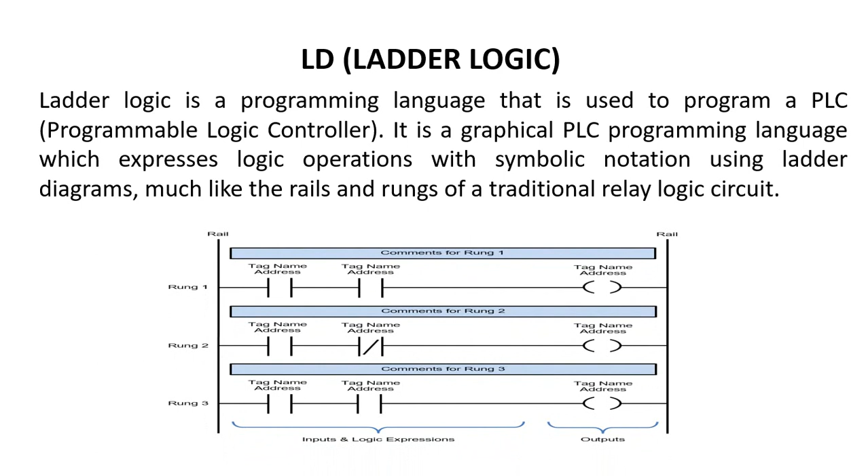So, ladder logic diagram. A ladder logic diagram is a programming language that is used to program a PLC. It's a graphical PLC programming language which expresses the logical operations with symbolic notations. Using ladder logic, we can draw many applications simply. So it has rails and rungs for a relay logic circuit. So this is an example with a rail and a rung.

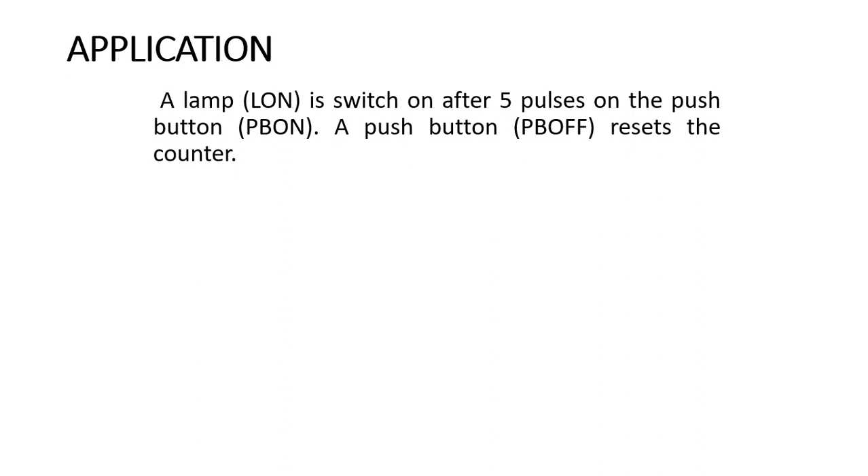Now we are going to design a ladder logic diagram using a counter. The application is: a lamp L is switched on after 5 pulses of push button PB on, and PB off resets the counter. So we can take the address of PB on as 07 and PB off as 08, and the lamp on is at 06. How to manage this application?

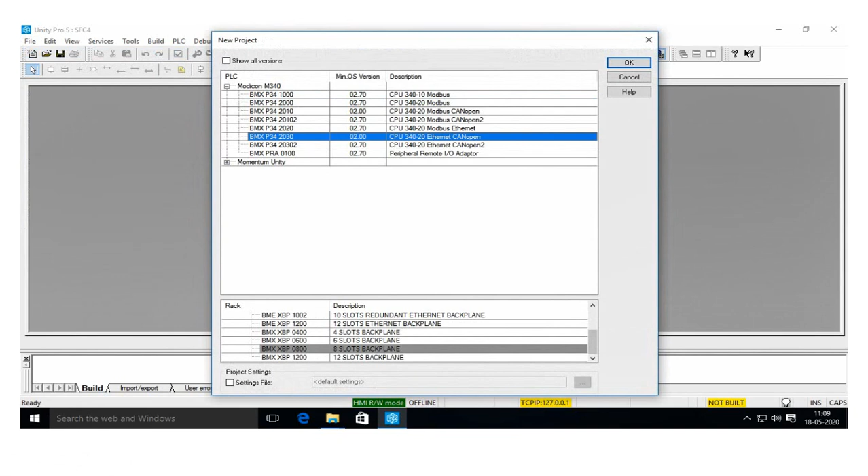So we are going to see about the counter application now. For that, go to File, New, wait for the module P34 2030. We have clicked it. Give OK. So it takes some 2 minutes time. Then go to PLC bus. Double click on the PLC bus.

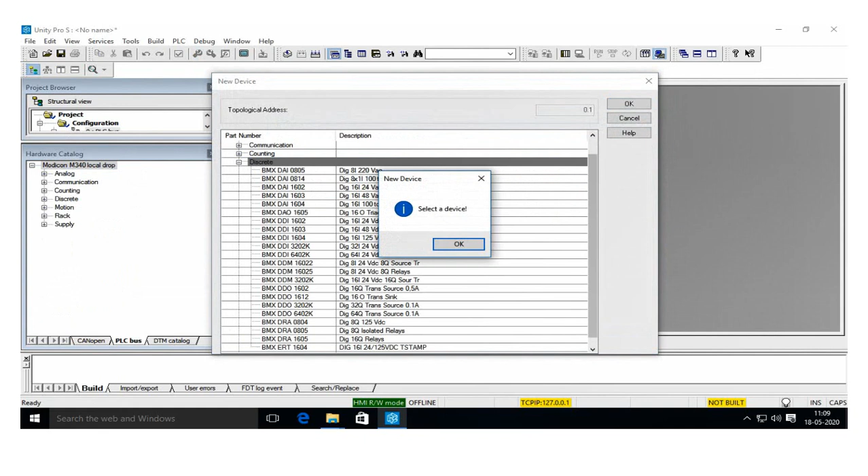Then the input slot. So it is DDI. Click on discrete. Give DDI 1602. And output is once again discrete, DRA 1605. I will configure the inputs and outputs for that BMX DDI: IO objects, %I. I will give update grid.

In that, for our application, I will give PB on, PB off, and L on. As per our application, I will give it in the 7th slot. Okay, that is PB on. I'll put it in caps for the identification, PB ON. And similarly, I'll create PB OFF. So I've created that also. Then I'll give update grid.

Once again, I come to the PLC bus. In that, I'll create IO objects, %Q, update grid. And I will give the output as 2.6 as per our requirement. So I will give it as L on, that is lamp on. And once again I'll create it and update grid. So this is done.

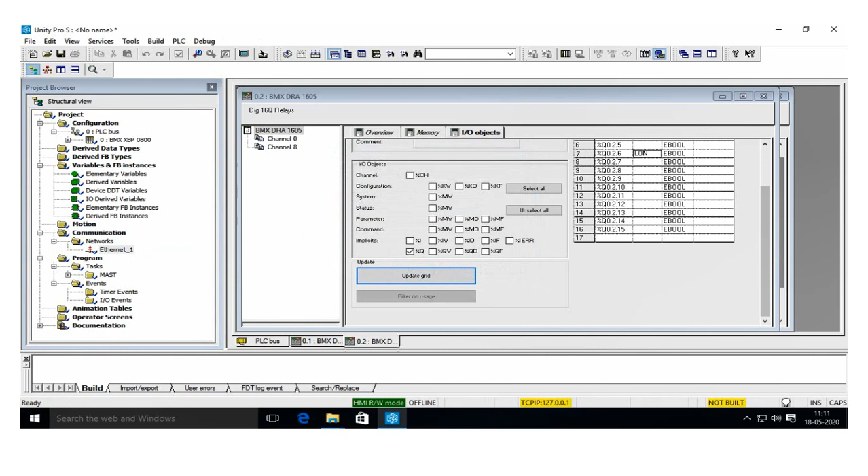Once again come to the navigator, communication. I want to make a new network. So it will be Ethernet by default. I will click OK. Once again I will click on the Ethernet. IP configuration I have to do. It will ask for the change of family.

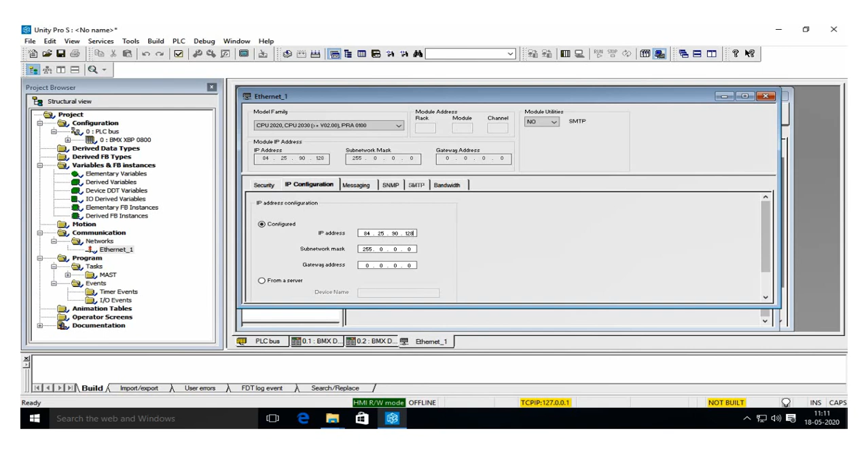And I will give the IP configuration as: first it is 84, dot 25, then 90, once again it is 128. So I will validate it, but still it's not solved.

I'll go to PLC bus. In PLC bus I'll double click on the port. IO objects, sorry, channel 3 in the TCP IP. Link is Ethernet 1. I'll validate that. Okay, now the validation is done. Ethernet is active.

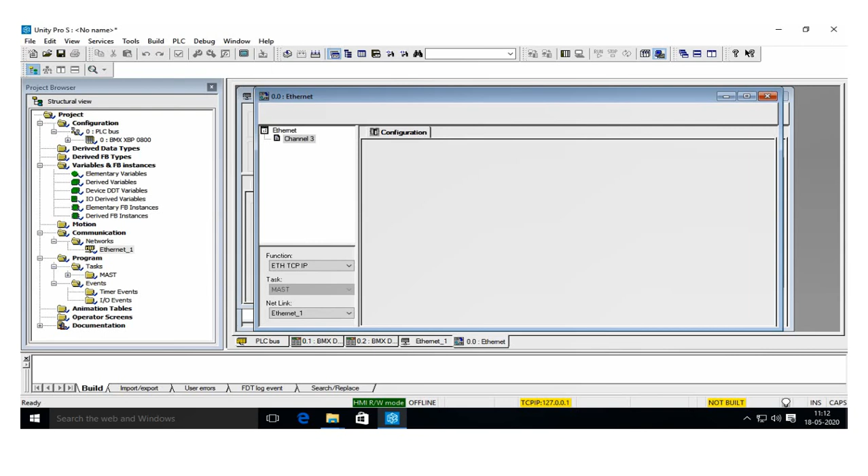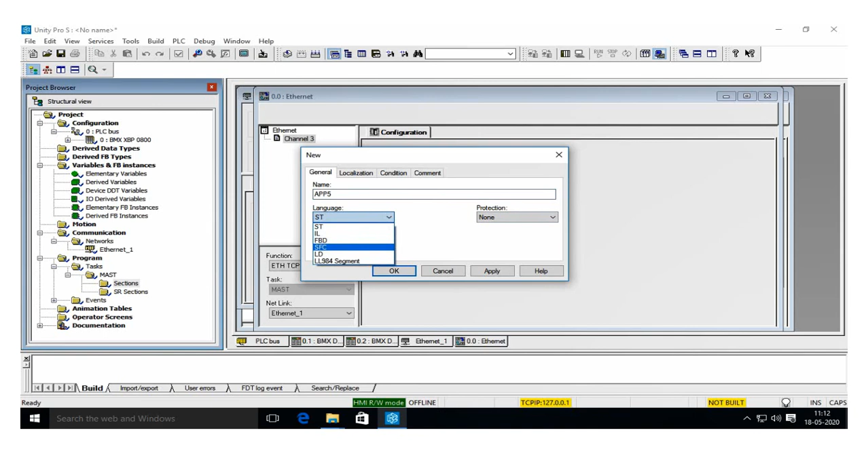Okay, now I am going to create the application. For that, I'm going to the MAST, and in that, event sections, new section. So it is counter application, or I will name it as the application name APP. So it is almost 5. Give LD and give OK. Now the working screen is open.

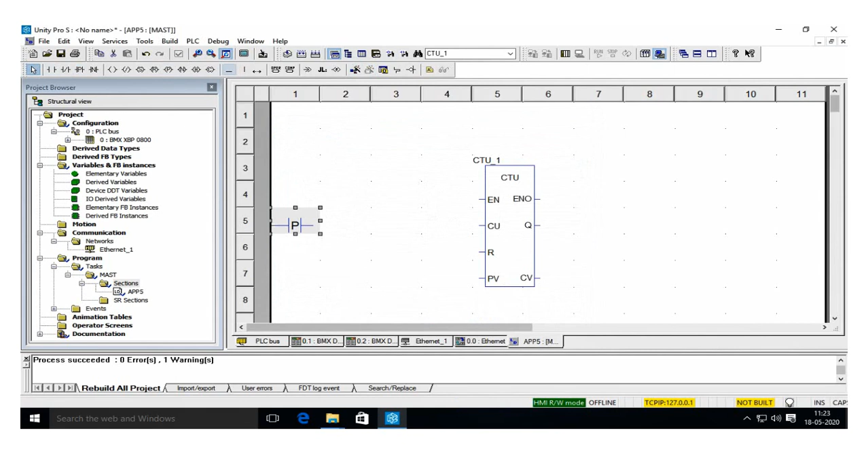Now go to the functional block. It is an up counter. So type CTU, and you will get the up counter block. Drag and drop here. Then we want the input. Here we have to notice that we have to give the pulse input because we are counting the pulses. So we have to give the pulse input and we have to join it. So pulse CU is nothing but up counter. R is reset value. Okay, this is enable.

Okay, this is enable output. Q is the active bit. PV is nothing but preset value. This is the current value. So this is about the various parameters in the up counter.

Then for resetting, we have to give one more push button. So that is not a pulse. We can connect it directly. Okay. So this is the pulse input. I have connected and I have got the output. Similarly, the output will be connecting to the Q bit.

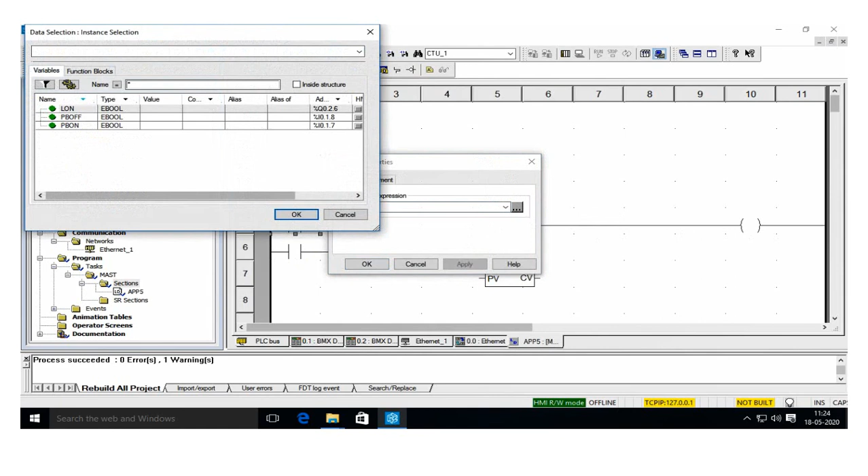Okay. So now we want to give the addresses for the following. Double click on it. Go to the variables. First one is PB on. We are going to count the pulses that I'll give. Then once again for resetting, I want one more button. So I will name it as PB off and I'll give. Okay. Here the output is nothing but the lamp should on. For that I'm checking for L on and I'm giving okay. Now the input and output is configured.

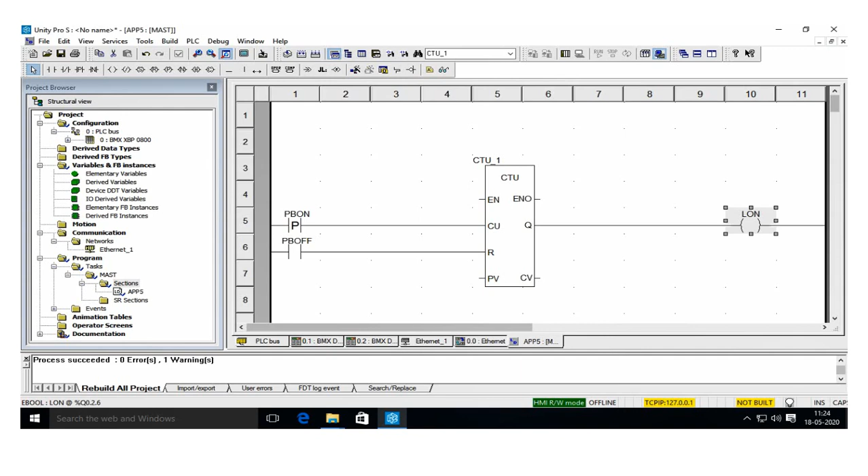So as per our application, we have to count the 5 pulses. Okay. So that will be given in the application. So I'm going to count the 5 pulses. So in the preset value, I will be giving 5. In the usage of timer, we will be giving seconds. Here it is not seconds, only pulses. So only 5 we can give. Okay. So this is about the drawing of ladder logic diagram.

So I drag and drop the CTU block. I have inserted the inputs to up counter. And for resetting, I have given reset. Okay. So this is the output. Now we want to run the program. So before that, we have to build the program. So I'm going to build it. So it is successfully done. PLC set address. I'll check the address. Okay, it is pakka. I'll give okay.

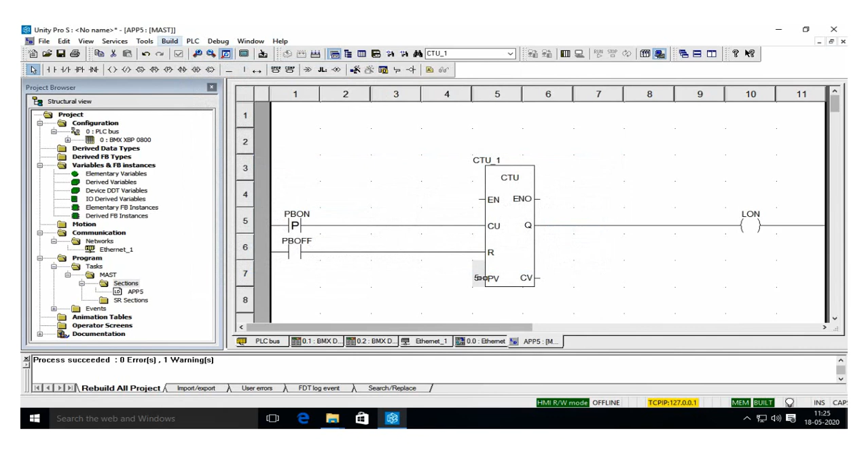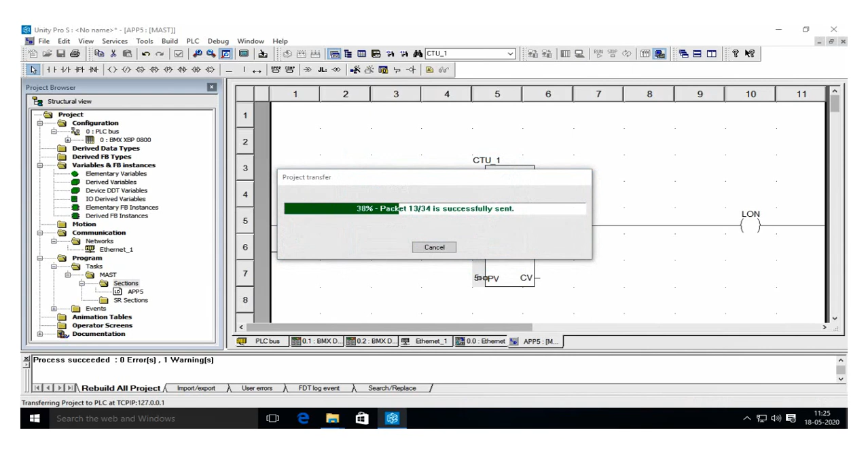Then I'll once again connect. Now it is connected. Okay. Now I will transfer the project. Because it is already in the simulation mode, we need not change anything. So it is done. I will give okay. Now this is the current pulse we have to give. Here the current value is 0.

So now I go to PBON, force value, I am giving 1. So the pulse is set to 1. So our program is after the 5 pulses, it should count. So first is 1. Next, I want to make it 0 and once again I have to give 1, because it is continuous pulses it will give. Once again I will go to force bit. So now it is counted 2. Similarly, we should make it to 5. So now it is 2.

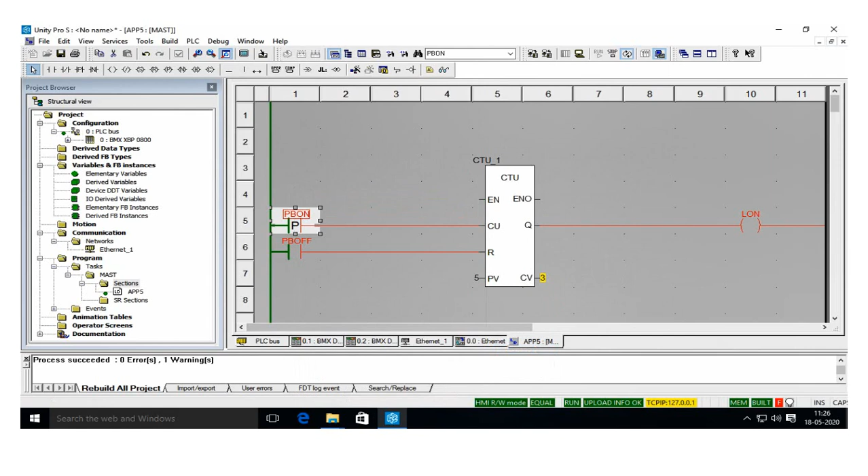Force 1. Now it is 3. Once again force value. So 3 pulses have been counted. Now force value is 4. Once again force value. 5. Now you can see the lamp is on.

Okay. So our application is after the 5 pulses of the push button, that is after the counting operation. So this can be applied in real time. That is whenever 5 persons in a row enter a college or auditorium, the lamp above them or fan above them should switch on. For that we can apply this application.

After that we have to reset it. So for resetting, I will go to PB off, and I will give force value to 1. So everything will be reset. Okay, so this is the real time application of the up counter. It is used to count the number of pulses, and wherever you want to activate the output, we can activate. I think it is clear to you. This can be modified with down counter and up down counter. Many applications are there. We can execute it clearly.